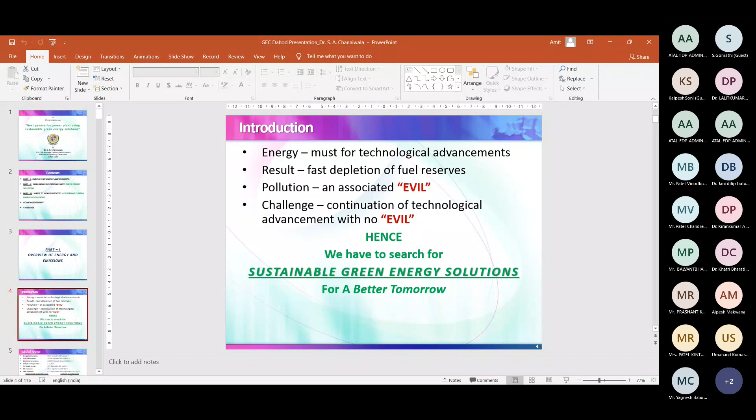I have divided my presentation into 3 parts. First part, overview of energy and emissions. Second part, coal-based technologies with green energy solutions. And part 3 is specifically added for you: Waste to Wealth projects, a sustainable green energy solution. And finally, I will give you a message.

Part 1 is the overview of energy and emissions, so let us talk about that. Energy is absolutely necessary for technological advancement, no element of doubt, right? What is the result? Fast depletion of fuel resources, and second is pollution, which is an associated evil. So what is the challenge before us? Continuation of technological advancement with no evil. Hence, we have to search for sustainable green energy solutions for a better tomorrow.

Now I take you to some data.

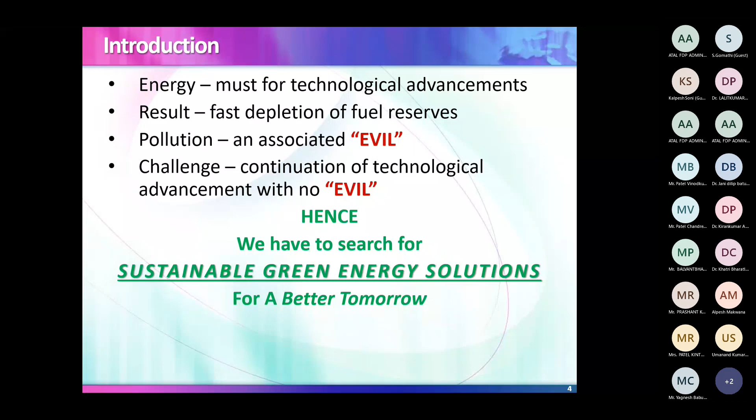If you take a global scene, your energy consumption is 584 exajoules. Coal consumption is 158 exajoules. Electricity is 27,000 terawatt hours. Our luxury ratio, which I call the vehicle to people ratio, is 1:6.75. Per capita is 75.7 gigajoules. CO2 emissions are 34.17 gigatons, and GHG, that is your greenhouse gases, is 47.5 gigatons of CO2 equivalent.

Now coming to the Indian scene, our consumption is 34.06 exajoules. Coal is 18.62 exajoules. Electricity we are producing is about 1600 terawatt hours. We are good enough - vehicle to people ratio is 1:5.63. Per capita is 24.9 gigajoules. And GHG is 3.24 gigatons of CO2 equivalent.

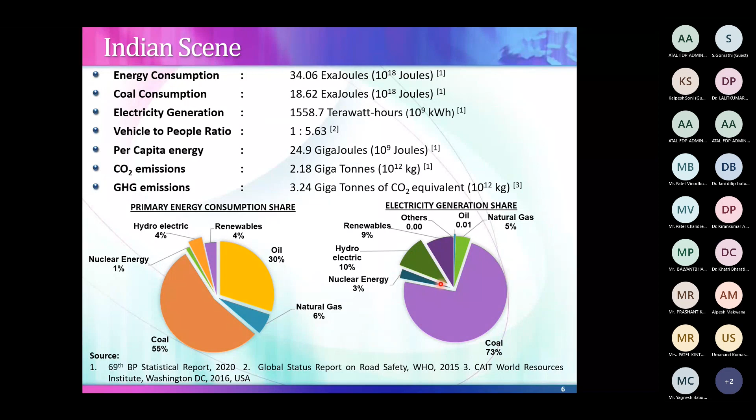So what is the consequence of high rate of energy consumption? First is the energy crisis. The world petroleum resource may be depleted by the end of this century. The world coal resource may be depleted in the next 2 centuries. This is data from BP Statistical Review at the end of 2019 - we will have 49.9 years only for oil, 49.8 years left for natural gas, and for coal it is 132 years. These are statistical data which is left with us. By exploration of new resources this data will change, but as of now this is the data available with us.

Second is, what is the consequence of pollution? First is global warming. In underdeveloped countries, the rise in temperature is 0.02 degrees centigrade per annum, and in developed countries it is 0.05 degrees centigrade per annum. A report from New York University said that New York will be flooded by the sea in 30 to 60 years, Mumbai in 200 to 250 years, and Surat will see sea water flooding in 250 to 300 years. That is the detrimental result of global warming.

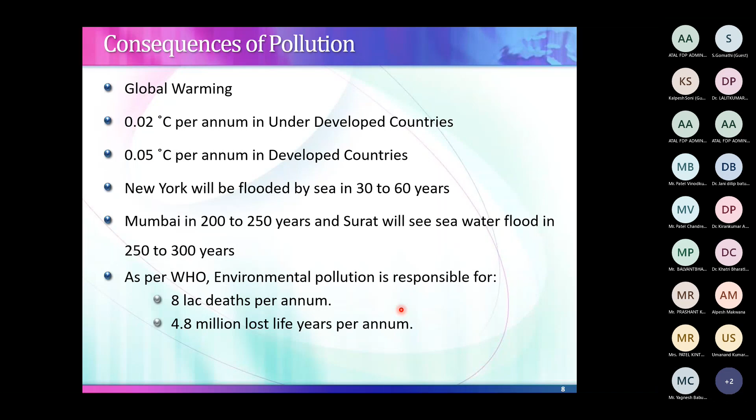Second part - as per WHO, environmental pollution is responsible for 8 lakh deaths per annum and 4.8 million lost life years per annum. So this is the alarming situation.

What this means is that we must search for feasible technological pathways towards sustainable green energy solutions. This solution must be adaptable to existing technologies and not imaginary - we should not talk in vague terms. Whatever solution we suggest, it must be adaptable with existing technologies. Then only we can search for sustainable green energy solutions. This is a fundamental requirement.

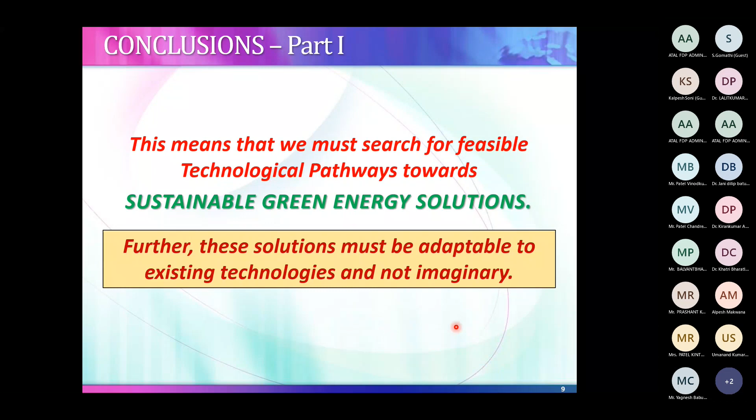Now, what we have seen is that the majority of power plants across the world and across India use coal. So we talk about coal-based technologies with green energy solutions - how we can make it more green? That is the part which is of concern today for every scientist.

So now look at it - we use coal and then we prepare coal, and this prepared coal is in the form of pulverized fuel. It is fired into a boiler, which is a pulverized fuel fired boiler, and we produce steam. The moment we fire this pulverized fuel

in the boiler, what problems do we face? Efficiency issues, higher stack loss, fly ash handling, higher CO2 emissions, higher particulate emissions, higher tube temperatures, higher erosion rate because of the particles - it will erode and reduce boiler availability and life due to erosion. These are the problems which we face at almost all power plants. Now we'll try to attack these problems first, and then we'll talk about something else.

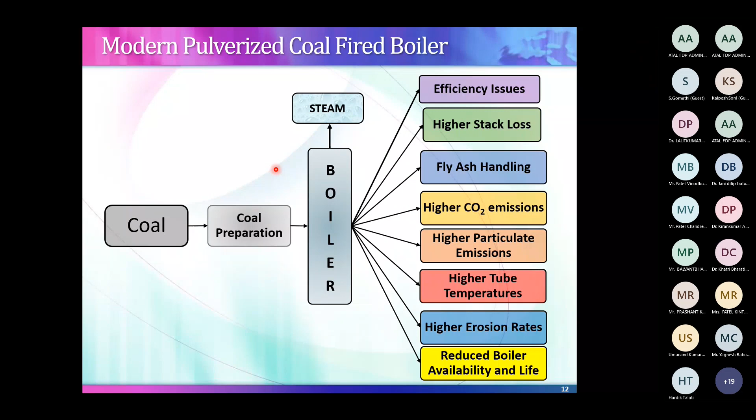Eta B is output by input. Output is the energy content of the steam. Input is the fuel energy, m dot f into GCV at P equal to constant. I write this specifically because all power boilers operate at constant pressure combustion. It is a fundamental requirement.

Now if I want to improve this simple equation, examine efficiency eta B. Eta B plus delta eta is my increment. What I have to do is increase m dot s. With this part we can improve efficiency.

Second part, this HFG, whatever is required in HS, HFW - decrease HFG, that is go for supercritical, so that will decrease my m dot f. Moment we enter supercritical, water directly converts to steam, so no latent heat component comes into the picture. Third aspect, simultaneously increase m dot s and decrease m dot f. So we can achieve much higher efficiency improvement.

These are mathematics. Now in practical, how can we do it? I look at the boiler efficiency from another angle. There is combustion taking place, so there is an efficiency of combustion involved.

Once heat is generated, it is transferred to the water to convert it into steam. When this is transferred, I use the word eta HT, that is heat transfer efficiency. So eta B is eta combustion into eta HT.

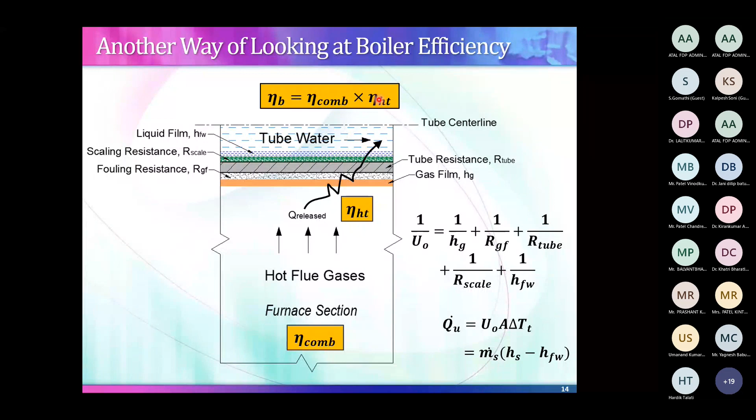Now let's go one step ahead. To achieve this, use advanced fuel additives. Advanced fuel additives have catalytic effect, so combustion efficiency improves and m dot f goes down. Similarly, these fuel additives have anti-fouling agents, so surfaces become cleaner, heat transfer improves, and m dot s is improved.

Apart from this, one beautiful aspect with this additive is it decreases emission, so global warming will reduce. Similarly, it reduces clinkering, so boiler maintenance decreases and boiler availability increases.

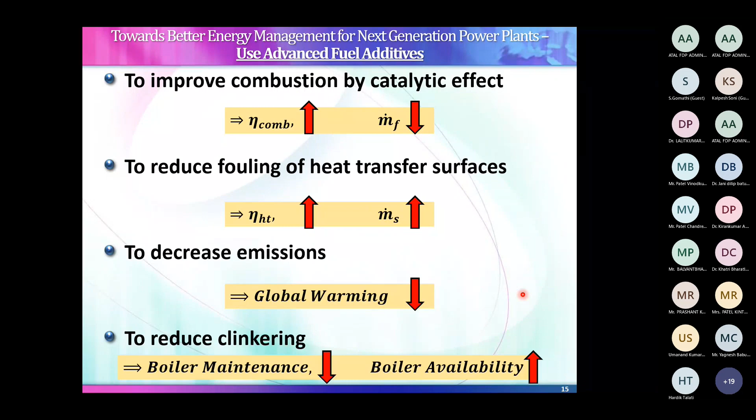In order to prove this in reality, we designed one fuel additive in 1995 and took a trial on Ukai thermal power station, 210 megawatt units. These are the data which we collected from the power plant, as per BS 2885 boiler efficiency test.

This is the layout of a boiler at GEB Ukai - all radiant superheaters, pendant superheaters, convective superheaters, and all economizer banks.

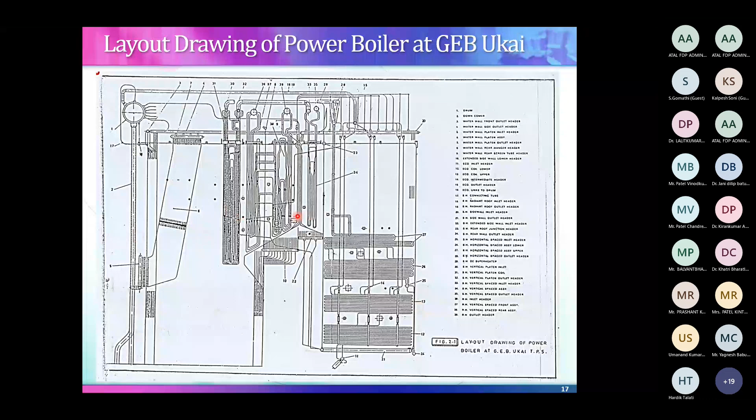And this is the effect we got. Auxiliary power consumption without use of the additive was 111.56 MWH per shift; with it, it has reduced by this amount, meaning fouling has definitely reduced. Boiler efficiency has increased from 80-83 to 85.64.

Generation efficiency has improved from 39-40 to about 40.661%. Overall plant efficiency improved from 36.59 to 37.56%. This means at this plant load factor, considering only 65%, there is a fuel saving of 19,621.1 tons per year, and economic saving is 2.8 crore rupees.

What is the dosage? Only 20 ppm of this particular additive, 95 SC. This additive was devised by me, and the technology was transferred to Altreat Chemicals.

Then on plant emissions - without the additive, NOx, CO, and SO2 had these values. With the additive, particulate reduced by 5.41%, SO2 by 58.24%, and NOx by 18.33%. This means the additive works for improving efficiency as well as reducing emissions.

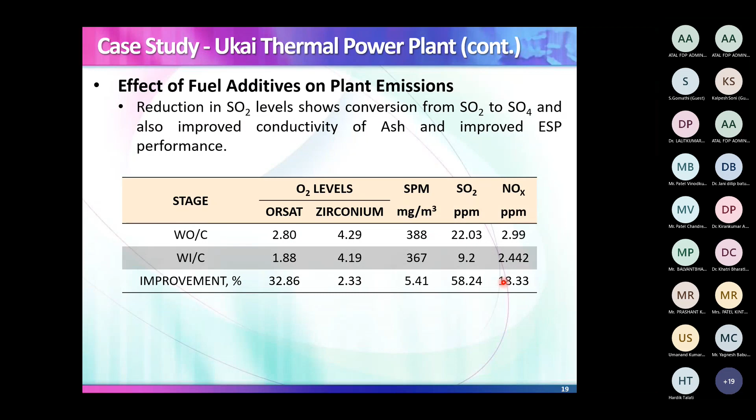The second case was a Panandhro thermal power plant which uses lignite as fuel. Lignite is the most detrimental and typical fuel to handle. The chief engineer of Panandhro called me saying they were facing a severe clinkering problem, with large swellings formed, and the boiler was under shutdown for 6 months to crack those swellings. He requested me to help.

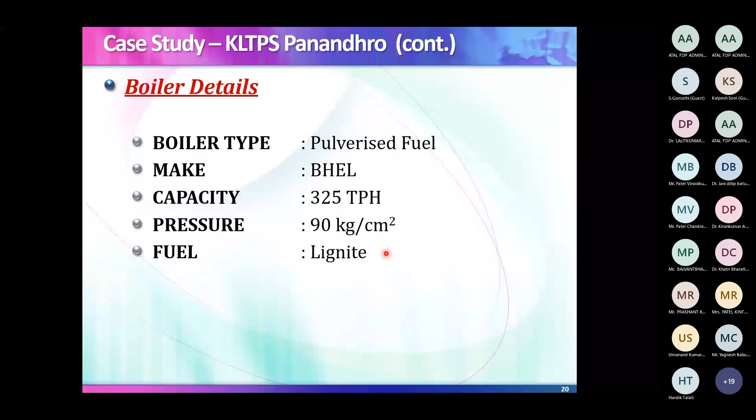So what I suggested was we developed another additive, 95 SCA. My name appears here indirectly, and the dosage was 40 ppm, that means 40 grams per ton.

Then there is a reduction in spray water. That means the heat transfer area of the tube has become much cleaner, and the steam generation is also improved. The spray water normally used to control the temperature of superheated steam reduced in use, showing some catalytic and anti-fouling effect. Without chemical it was about 27 tons per hour, and with it, reduced to about 18 tons per hour. This is also a sizable benefit.

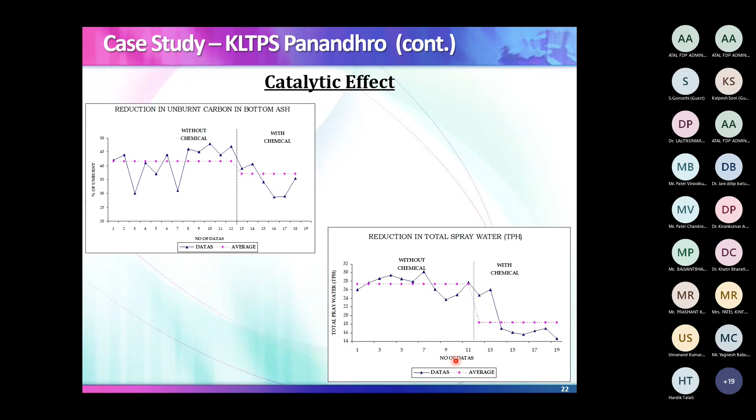Anti-emission, a sizable effect. Without chemical it was above 900 ppm, and with it has come down to 490 ppm. So this is the effect on anti-emission. That is the effect of that 95 SCA.

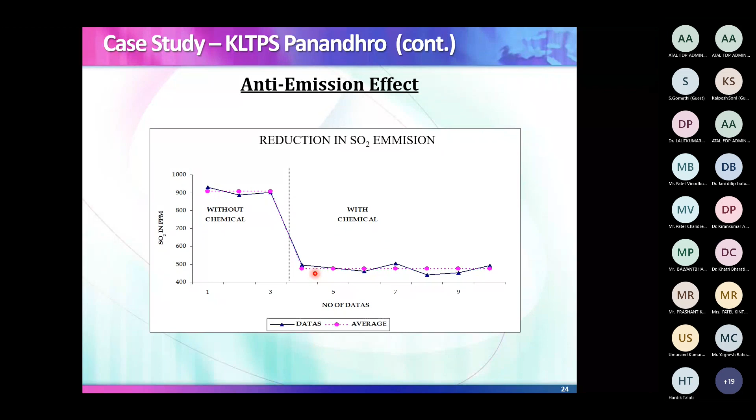To summarize: auxiliary consumption reduced by 3.21%, boiler efficiency improved by 2.74%, generation efficiency improved by 2.51%. At Ukai the efficiency was 34, but here it is 24 because lignite has low calorific value and is very typical high moisture, so that stack loss is much higher and efficiency is less. SO2 reduced by 23.78% and SPM by 30.92%.

So what is the fuel saving? 13,788.5 tons per year is the saving of fuel.

What observations did we see later on? This has been continuously working since May 97, 98 till now, and they are still using this additive. The benefits observed are longer boiler availability, reduction in downtime, and reduction in oil consumption, because once the boiler is down you have to fire oil, so that has come down as downtime reduced. There's reduced boiler outage due to reduction in clinker formation, and more MWH generation due to reduction in fouling and cleaning time. This is the beauty of this particular additive.

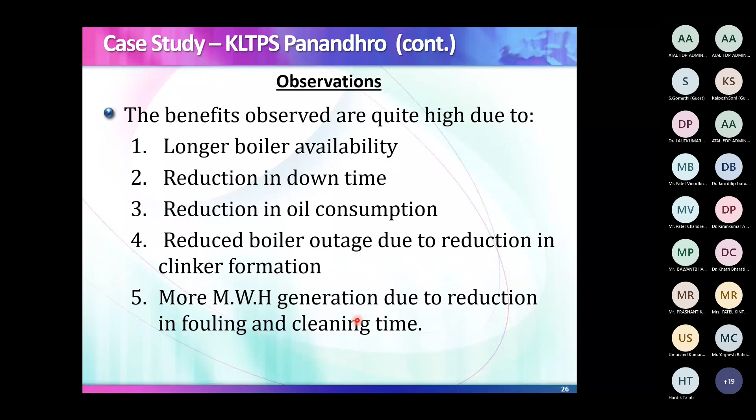These are the advantages we have been getting for more than 20 years. Now, the next step: fuel additives can improve efficiency by 2 to 5%, beyond that there is a limitation. So what is next?

The moment you go to supercritical, the critical point is 22.1 megapascal pressure at 374.1 degrees centigrade. Once we enter the supercritical region, pressure is 27 megapascal, temperature 593, and efficiency is 38.5%. If we enter ultra supercritical, pressure is 31.72 megapascal, temperature 604 degrees centigrade, and efficiency is 43.3%. So from 34% we can raise efficiency by 10% by going to ultra supercritical.

This is a benchmark. What is our current research goal? 36.5 megapascals and 704 degrees centigrade — this is the current goal.

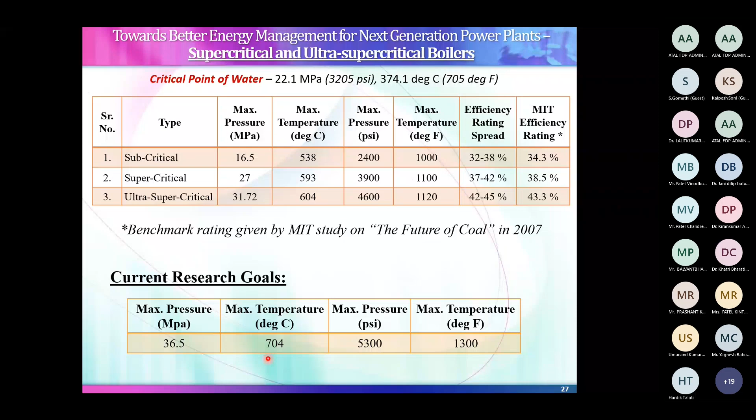If we increase the source temperature, then as per Carnot, W by Q1 equals Q1 minus Q2 by Q1, so 1 minus T2 by T1. T2 you cannot change because it is the atmosphere, so it is a sink. But T1 is under your control. The moment you increase T1, we are getting more and more efficiency.

So this is my subcritical line, 16.5, and we are getting 34.3%. Then this is my supercritical, 27 megapascal, 593, 38.5%. And then this is my ultra-supercritical, 31.72, 604, and 43.3%. And this is the latest, 36.5, 704 degrees centigrade, so greater than 50%.

That means now we have to switch from subcritical to supercritical or ultracritical or super ultracritical to achieve higher efficiency from the boiler.

Now, boilers even still use coal as fuel. Coal has the same problems when you pulverize it. So how to manage emissions? Now our target is towards combined management of energy and emissions.

What I do is incorporate a coal gasifier. What will the coal gasifier do? It will gasify the coal. All ash and clinkers will come out here and pure gas will be fired into the boiler. The moment we fire pure gas, the boiler efficiency will definitely improve and associated problems will be minimized.

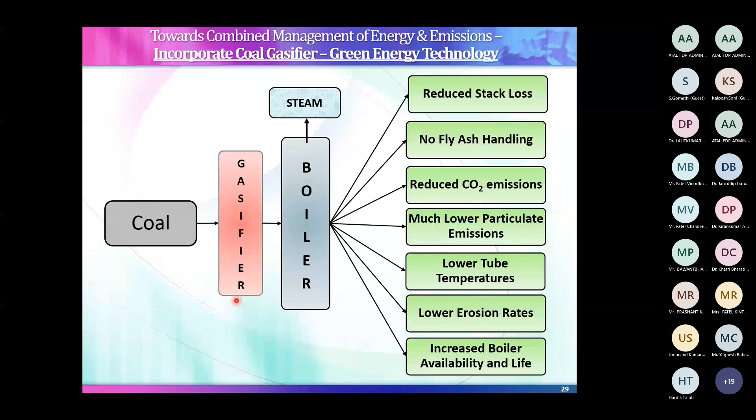What is gasification? It is a thermochemical conversion of carbonaceous feedstock into gaseous fuel. Gasification is classified as a clean energy technology. It improves overall conversion efficiency by 1 to 3%. It reduces particulate emissions by 50 to 80%. It reduces CO2 emissions by 10 to 30%. It enables gaining carbon credit for a country like India.

My preliminary calculation shows that through the use of gasification, CO2 emission is reduced by 28.24%. This means that if I use 1 million tons of coal gasified, this will reduce 2.1824 million tons of CO2 emissions, and we will earn 2.1824 million carbon credits. That's the beauty of gasification.

Now, what is the application? It has a very wide application. You can use a gasifier for process heat requirements. All ceramic industries in Morbi use gasifiers. You can use it in steel industries and glass furnaces. You can produce steam - all process steam requirements of wet process units, like textile, can be met through the use of gasification. And you can produce power, either small scale, medium, or large power plants, for improved efficiency with minimum emissions.

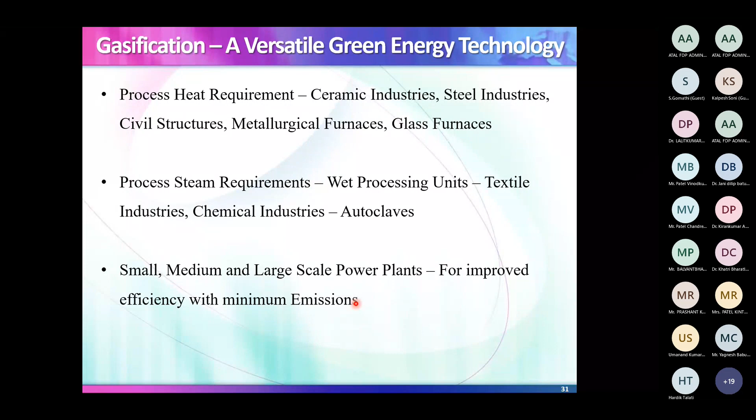Now, what is gasification? The term gasification covers the conversion of any carbonaceous fuel to a gaseous product with a usable heating value. It converts the entire non-ash fraction of the feed to gas. So this is my feed - there is a gasifier, I supply partial air. You will produce the producer gas here with this composition, and some char and ash will come out. That means this won't go to the boiler, so no erosion, nothing. And this gas you can use for power generation.

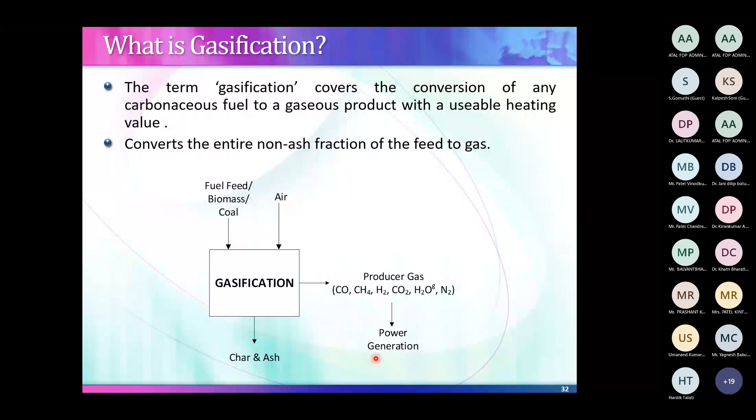This is the outcome. How many types are there? First type I call a downdraft. That means your feed is fed from the top, air is also given from here, it comes out and gas is taken out. That means flow is downward, so it is a downdraft.

Second one is updraft. Air is fed upstream, fuel is coming downstream, and the gas is taken out from here. So there is upflow of gas, hence it is updraft. And these are the zones which appear in the gasifier.

Cross draft is where I supply air from here and take out gas from the opposite side. So it is a cross draft. These are all known as fixed bed gasifiers.

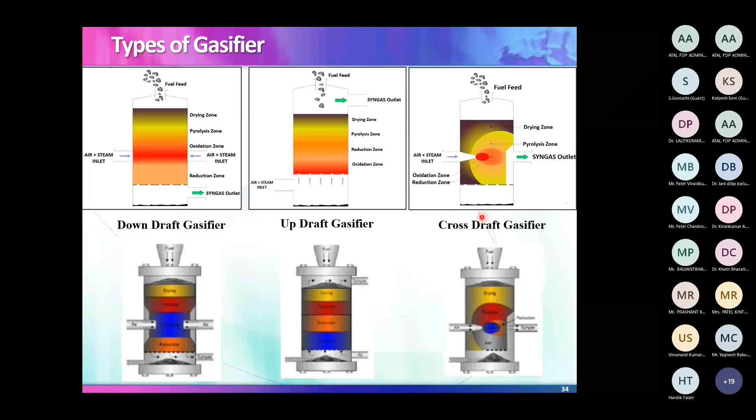Still more advanced is the circulating fluidized bed gasifier. Here you can see a complete circulation takes place. This high pressure circulation takes place and your gas is taken out from the top, and this is the ash which is taken out.

So this is circulating, and the most advanced is plasma. The moment you deal with high ash content coal or any waste or industrial hazardous waste, you have to go for a plasma gasifier - there is no other option with you. So this is the most advanced technology, and this also I will share with you at a later stage.

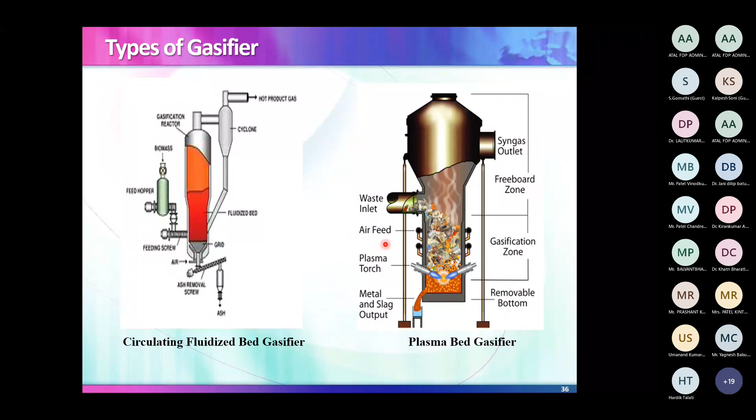Now, it's often said that gasifier is a green technology, but when I was working at IIT Bombay on my gasification project, I encountered this problem: particulate emissions, liquid tar. It was eroding all my valves, so the engine used to be taken for shutdown very frequently. Then contaminated effluent, because we need to cool the gas by spraying water, which produces effluent. Then there is gas leakage, and overall efficiency is quite poor.

How to tackle this problem? This was my area of research from 1992 onward, after completing my PhD. My continuous thought process led me to conceptualize a zero discharge gasification system. TAR - how to minimize TAR?

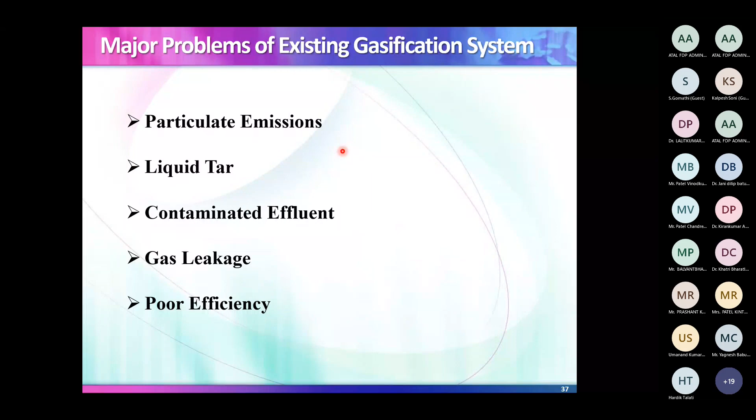Capture it in a wet ESP, then vaporize or crack it in a kiln, and then refire this in the oxidation zone of the gasifier. So your TAR will minimize.

Contaminated effluent: go for an indirect cooling system, so your direct water spray reduces to about 5 to 10% only, no direct spray. This is through a series of coolers and condensers. Then that little effluent, you can condense this particular effluent and refire it back into the oxidation and reduction zone. For gas leakage, incorporate a water seal at the appropriate place so there is no gas leakage.

Incorporate SCADA. This is a system which will monitor the performance of the gasifier, and if there is any deviation in the operating parameters, it will try to correct it. So it is an auto control system.

I did not stop here. We modeled it - can we do this, because if you refire the effluent, probably your temperature levels will go down since it's water. If you refire the tar, probably it will reduce the temperature level. So first, believe me, anything you do, please do it scientifically - that means first make a model.

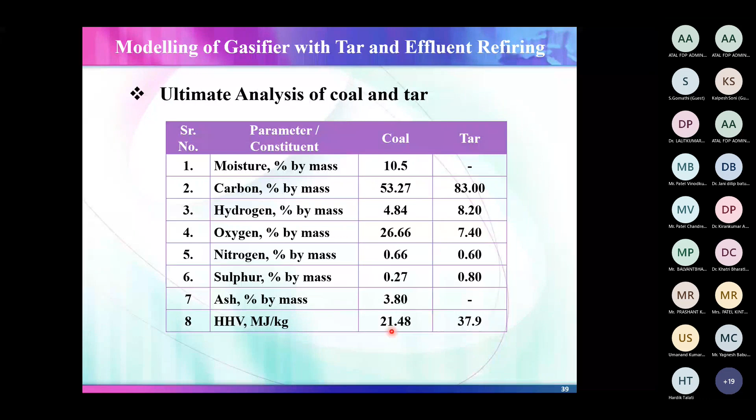Then thermodynamic modeling demands that you should go for constituent balance. So this is a total constituent balance, 5 equations, and then energy balance. Total energy in must be equal to total energy out. So that is it, and based on this you will formulate your model and see what gas quality you get.

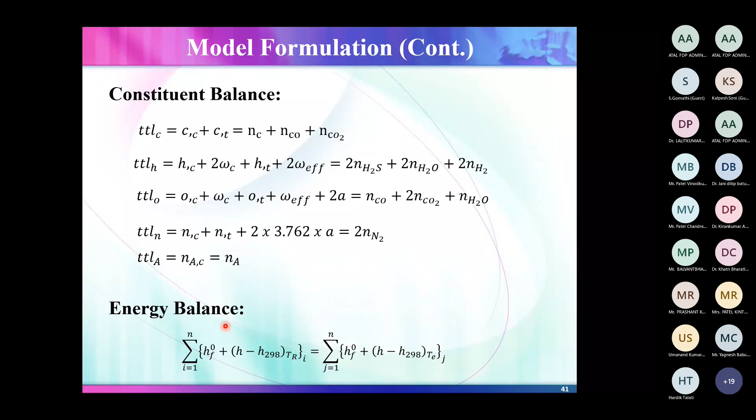All this model told me that your LHV is reasonably good, your efficiency is improved to 80%. Now this gives me confidence that if I refire my tar, if I refire my effluent, I am not going to get any detrimental effect, but we will improve the efficiency.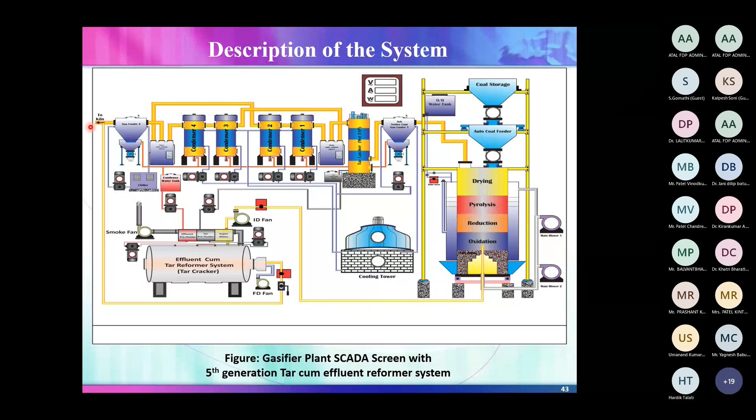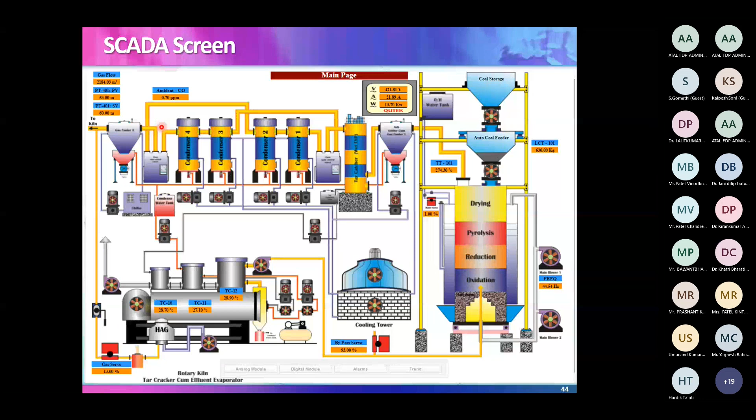Say the owner, these are Effil Ceramics, they produce vitrified tiles. Now these vitrified tiles demand about 1250 degrees centigrade temperature, and a normal gasifier cannot give that temperature. So he challenged me that Chanila Sahab, can you do it? I will take a risk to install your gasifier in my premises. I said we will do it.

Then there is a tar catcher, these are series of condensers, and there is a final settling chamber, and there is a chilling plant and cooling tower.

Another view, there is a chilling plant to cool the gas so that any moisture left out gets condensed, and a pure dry gas goes to the kiln.

Earlier, whenever the gas goes to the kiln, it has moisture, it has tar, so it will create black and white spots on the tiles. So the net export quality of tile which they used to get was less than 15%. With this technology, Arvind Bhai confessed that sir, we are now getting more than 60% of our tiles of export quality. So their production improved, their quality of production improved with this category of gasifier.

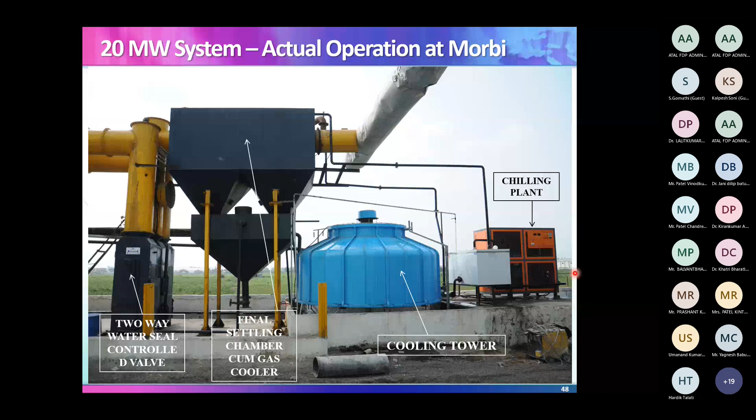Then I wanted to get satisfied by myself. What is the performance? This is the actual gasifier installed. After that we wanted to establish the performance, so we selected one small system, that is a 6 megawatt, and we carried out the performance and emission trials.

This is the gas quality which we got. You see what is the efficiency? 75.745%. What theoretical was 80%, we could get 75.745% in reality.

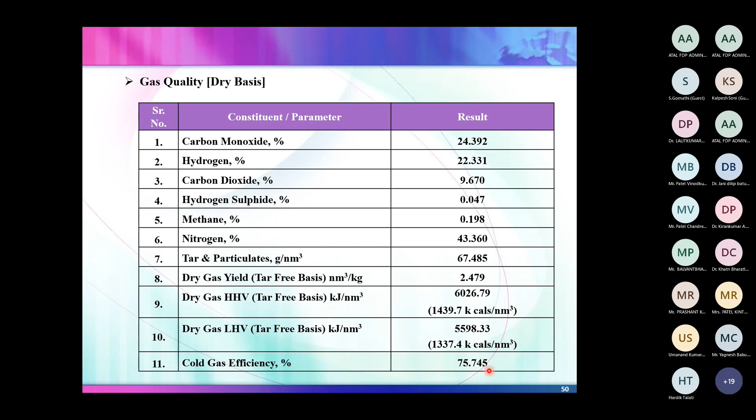And this is a complete mass balance. What is the mass input? Inherent moisture, biomass, steam, water, air - this is the 100%, about 1772.618 kg per hour is my input. What is the output? There is water vapor, CO, CO2, H2, H2S, all - and this is the output. So this is a mass balance.

This is absolutely necessary when you want to conduct a systematic trial. You must carry out mass balance and energy balance studies. There may be 2 to 5% deviation, accept it.

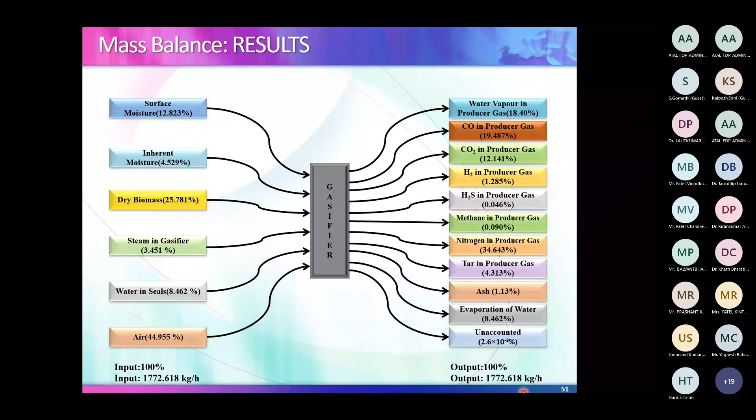And another important one, ambient air quality - because we are not emitting any particulates. Our emissions on the particulate side will come slightly later, I will show you the quality. These are the results - they are much less than the national air quality standard limits, so we are happy with these results.

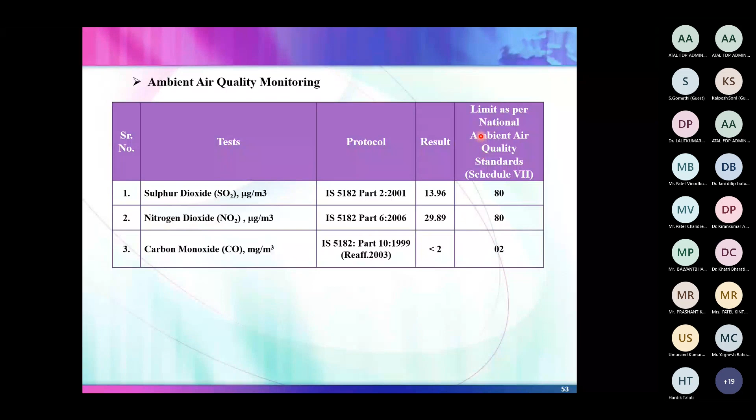And discharge - no tar, no effluent, no gas leakage. And the other part - 1 million tons of coal gasified could reduce 2.1824 million tons of CO2 emissions, and 2.1824 million carbon credits we can earn. So these are the results of my zero tar and effluent discharge technology.

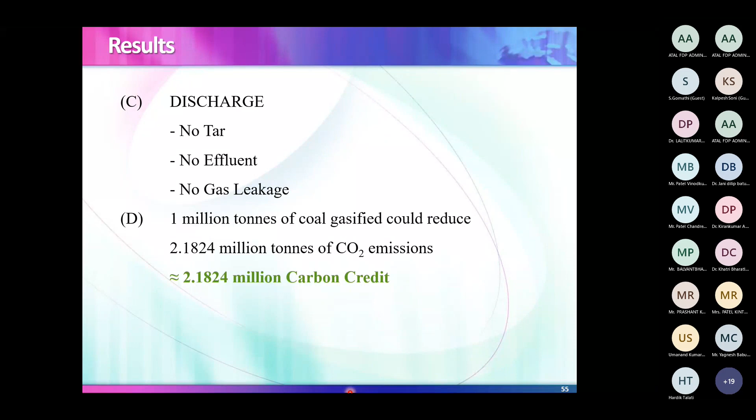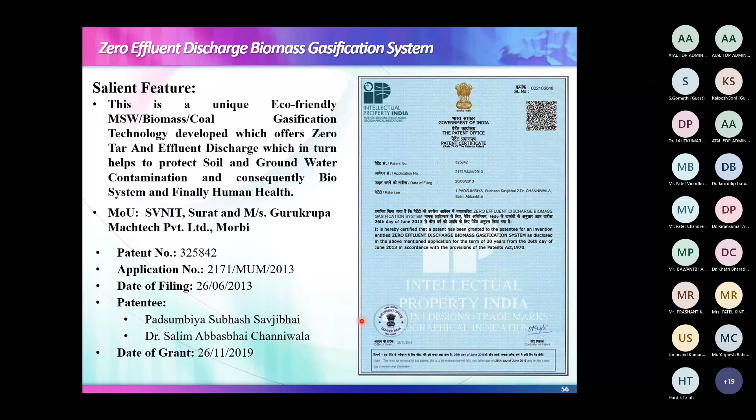They visited to actually assess is it really a zero discharge gasification technology, and they could certify that yes, it is 100% zero discharge technology. They visited Airfield Ceramic also and they were satisfied. And about that now, this personality is Dr. V.K. Saraswat - he is a principal scientific advisor to the Government of India, was a DRDO chief, and presently a member in NITI Aayog. He was also so impressed, he said I would like to visit your plant because it is the first across the country, and probably across the globe, which offers zero tar and effluent discharge.

So Dr. Saraswat visited Morbi and I was explaining him this research facility. He also visited Airfield and one more industry where this system is installed. Again, the same view - and this is from the National Air Pollution Control Authority, so they also visited this particular system.

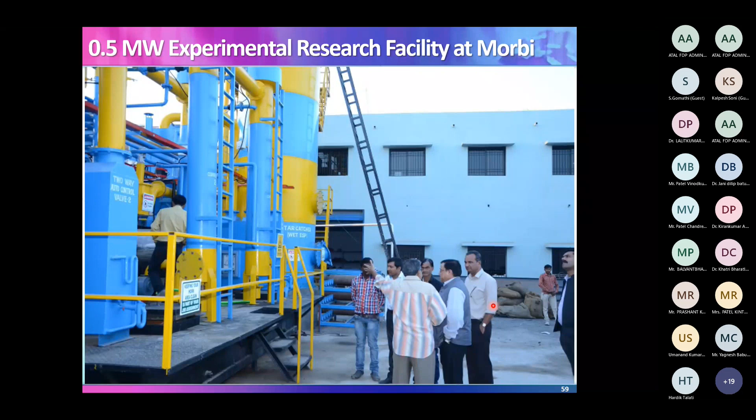Then the challenge comes now. Dr. Saraswat asked me, Channiwala, we have F-grade coal across the country which is about 45 to 50% ash. Can we gasify it? Can you develop a gasifier which can gasify such high ash content coal? Then this challenge was taken up.

Coal consumption, because of our increasing power demand, has grown by 5.7%. 56% of primary energy comes from coal, and India is rich in coal resource. That's the fortunate part. F-grade coal, the lowest grade coal, dominates major power generation, which is responsible for high particulate emissions and greenhouse effect.

So what is the solution? The solution lies in adoption of clean coal technology, CCTs as we call it. Gasification is one of the CCTs which reduces both particulate emissions and greenhouse effect. Hence one can focus on gasification of low rank, high ash content coal.

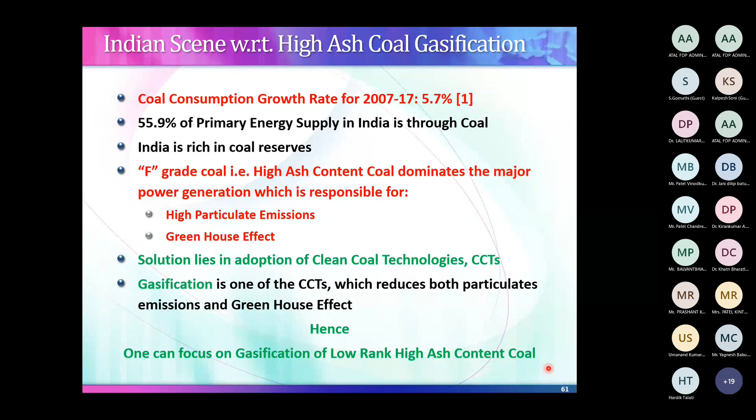Now this is a challenge. So this challenge was accepted, and what we did first, as I always advise all my students, is to theoretically establish yourself first. Do not neglect the theories which you have learned. They form the foundation or basis for any experimental work.

Once I was satisfied with this modeling result, then we conceptualized. What concept did we get? We developed a hybrid gasifier, that means partially fluidized bed cum updraft type. Why partially fluidized? Because this coal has high ash, so it needs to be surrounded by air, meaning we have to partially lift it. So partially lifting it means it is a partially fluidized bed cum updraft gasifier.

And these are the dimensions, and this is the 3D view of the entire gasifier. You can see the difference here: it is a feeding hopper. The difference lies here, in the high ash gasifier cell, and this is the ash zone. Then we fired that particular unit.

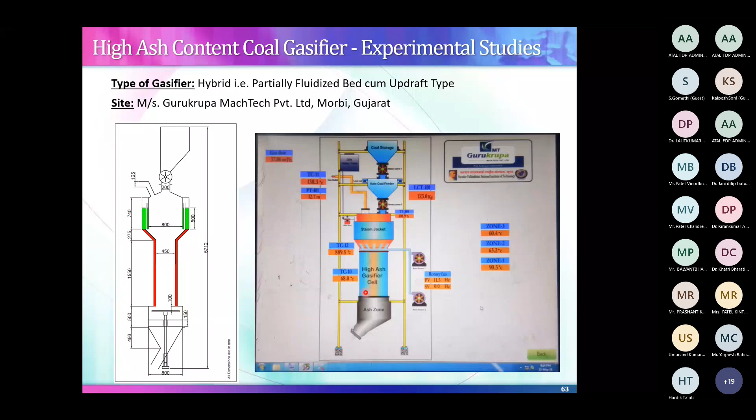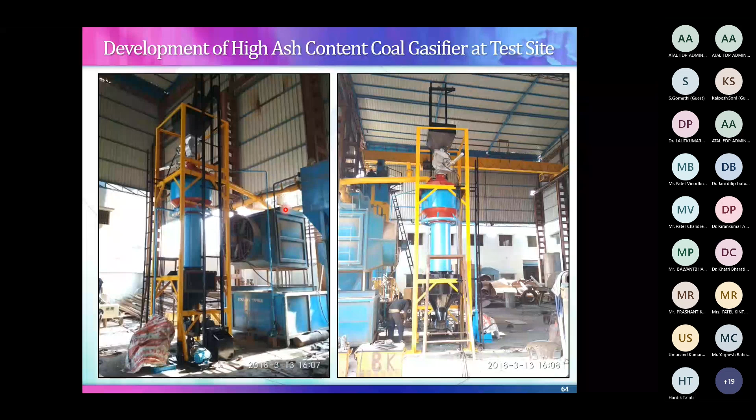Again, next step: first was modeling, second was development, third was now performance trials. So we took a performance trial on this gasifier, and these are the results. The average calorific value we could obtain is 4,500 kilojoules per meter cube, and these are the trial dates, May 18.

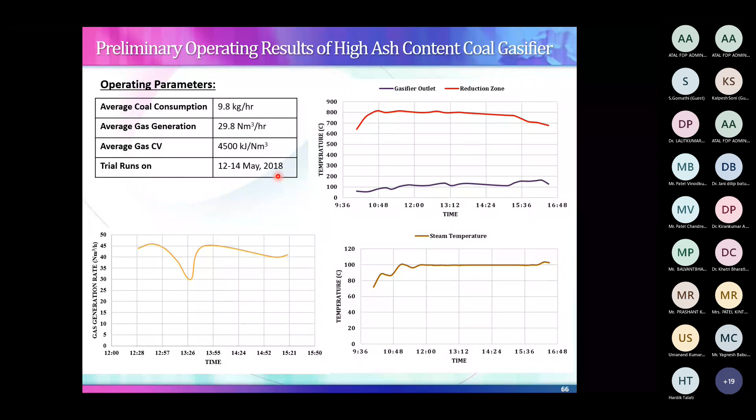Then we have enormous waste. Either you take hospital waste, or industrial waste, or municipal solid waste. Can we harness this energy to produce power? The answer is yes. So the first part we targeted was hazardous waste and hospital waste, meaning the plasma gasifier.

So this is all hazardous waste. This is taken to a gasifier which I call plasma. Only plasma can solve this problem, because whatever inerts exist, this hazardous industrial waste will generate dioxins and furans. These dioxins and furans are cancerous. The moment they are emitted into the atmosphere, and if you inhale them, cancer is going to develop over a period of time.

So dioxins and furans need to be killed. How to kill them? The only solution is you have to develop a temperature of about 1250 degrees centigrade, giving a residence time of 2 seconds minimum—then only will this get destroyed. So plasma is the only technology which can do this, and it will destroy your dioxins and furans.

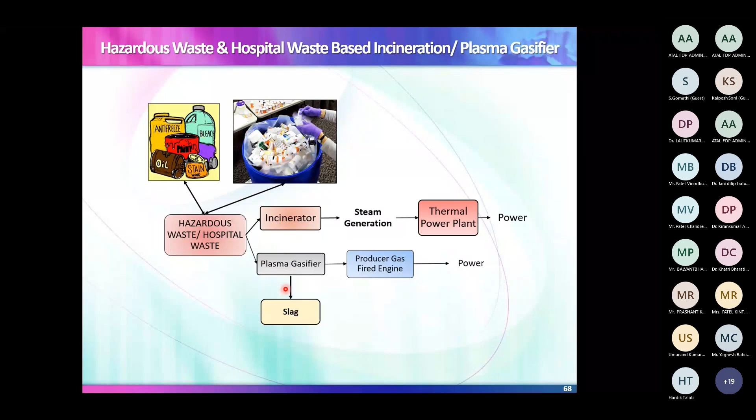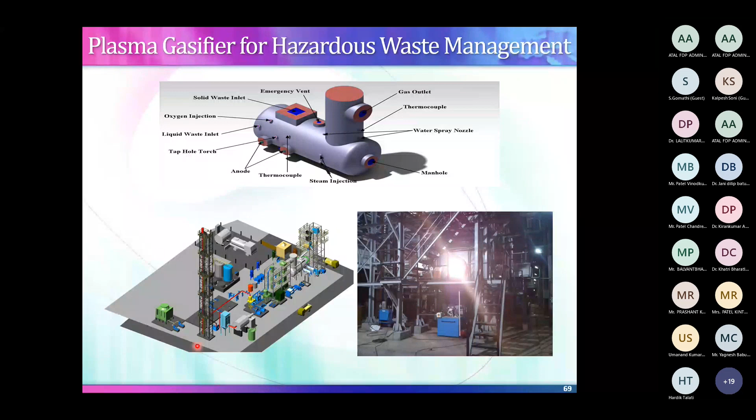What is the salient feature? This technology is devised to treat and convert hazardous industrial waste to wealth through gasification, and this was jointly developed by SVNIT and ANPRO Surat. And then came the next generation development: hybrid plasma gasification technology for MSW management, incorporating a patented zero tar and effluent discharge gasification technology.

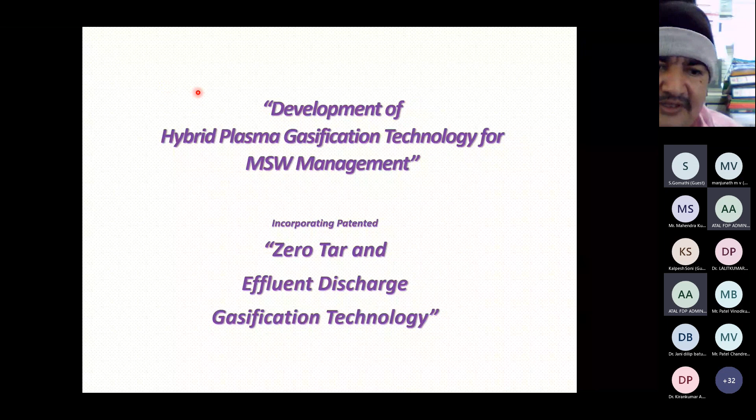Right, so now the next thing we thought about is that enormous waste is available in the country. If I give some statistical data, if we continue to produce our MSW at this rate, by 2030, one-third of the land of India will be covered by heaps of this MSW. That means we need to do something in this direction.

So taking this into account, we started development of this hybrid plasma gasification technology for MSW management. But this is not restricted only to MSW. When you go for plasma, you can use any waste, industrial waste, or even high ash content coal, anything you can use. And this we are incorporating with our zero tar and zero effluent discharge gasification technology.

So the first part, what is the objective? To model and design a small-scale hybrid plasma gasifier to manage 100 kg per hour MSW. This is the project of my Bhatnagar fellowship. They always say that your technology must be applicable to the society and beneficial to the society. So this was my first objective.

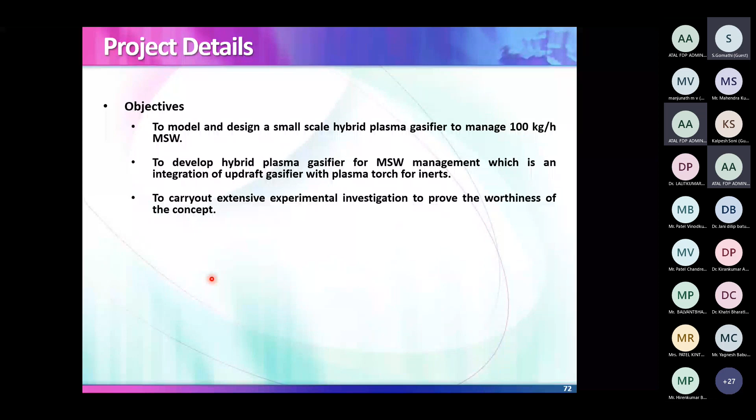So what we did, again same approach: first you go for theoretical studies and modeling, then the concept, then actual development, and then performance. So this is my input data: MSW 100 kg per hour. Organic in the MSW is all vegetable waste, house waste, food waste.

That is 50 kg per hour. Inorganic 50 kg per hour is present. This is the component which is our target, this is the composition: moisture, fixed carbon, volatile, ash and HHV, and this is my ultimate analysis. So with this data, we wanted to proceed.

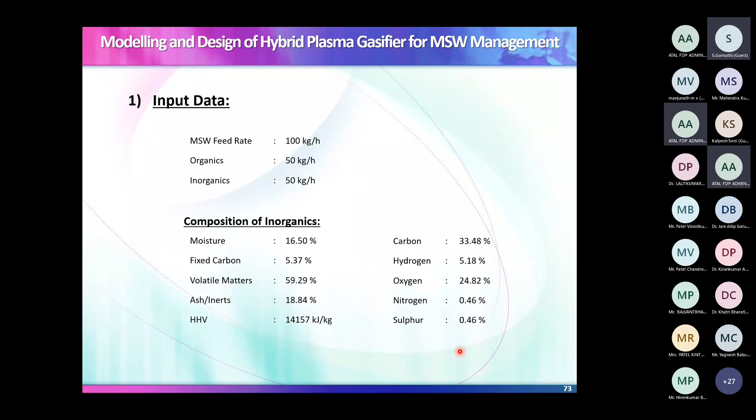We first went for energy balance because plasma technology is regarded as the most expensive technology, and normally it is an energy negative technology. That means whatever energy we give in is more than whatever energy output we get. So the first thing is we have to challenge this part. So I carried out the energy balance.

This is my input energy, 50 kg per hour. This is the calorific value divided by 3600. So this is my E dot in, 196.625 kilowatt. What is the output?

If I connect it in the gasifier, its efficiency is only 55%, I have taken, because a lot of inerts are there. And so output energy is this into this, that is 108.14 kilowatt is the output energy in the producer gas, which I get out of my plasma gasifier.

And what is the power produced? This gas will go to the genset, so eta genset will come into the picture. I have taken only 20% efficiency. So output is 21.628 kilowatt.

What is the plasma energy requirement? You have m dot S into Cp S into delta T. So sensible energy required to bring ash to its melting temperature, then ash into the latent heat, right? Plus, the moment it becomes liquid, you have to heat it to a desired temperature.

So here, m dot ash which we produce, because 18.84% is the ash in the material, 50 kg per hour is the feed rate, 0.84 Cp into delta T is 600 plus 500 into L is the latent heat, and this is the sensible heat for molten ash. So I need plasma energy of 4.59 kilowatt.

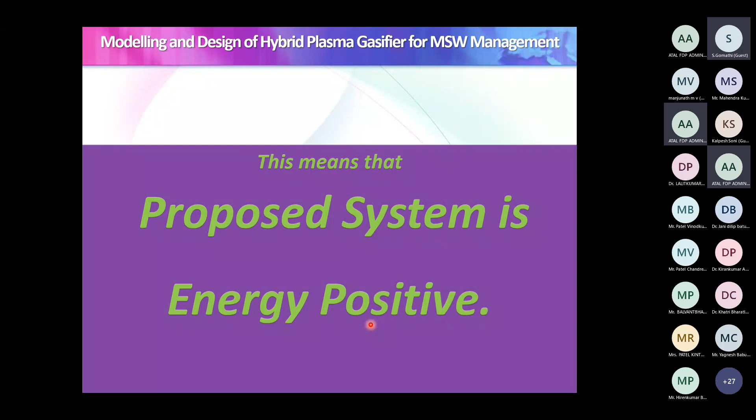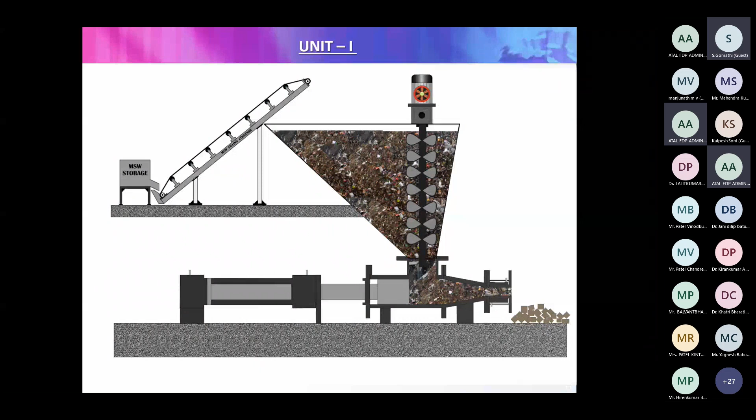What is unit 3? This ash is fed to the plasma gasifier. This will melt all this particular ash and you can have a liquid. This liquid can be molded to a desired shape. You can see, I have taken only paver blocks. And even whatever gas is produced here, this gas you can use for your power generation. What is the third unit?

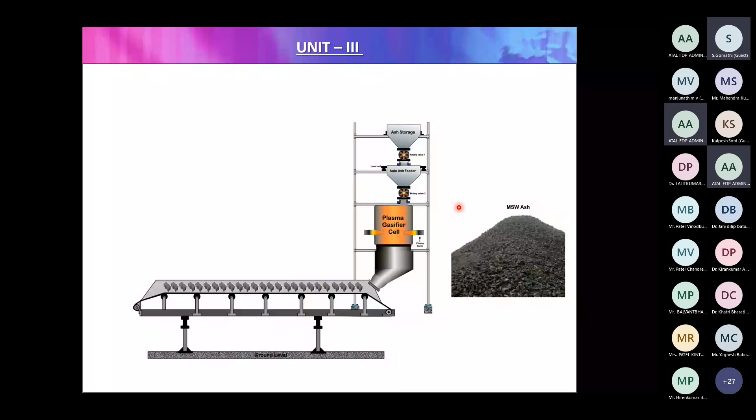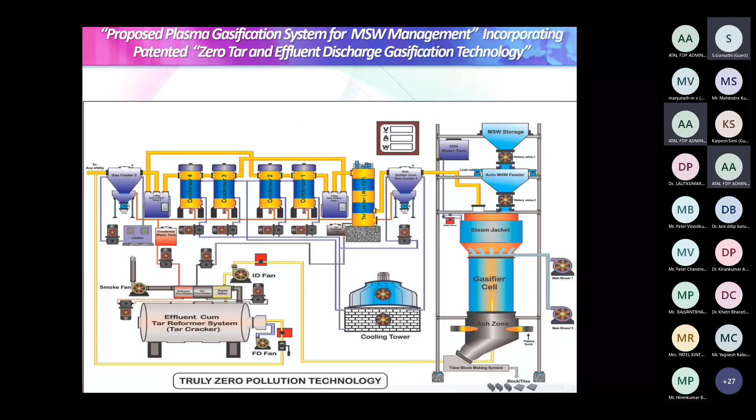And this is a complete schematic. The proposed plasma gasification system for MSW management, incorporating patented zero tar and effluent discharge gasification technology. So this is my gasifier. This is my plasma zone, and here is coming out your liquid. So it is a paver block.

And this gas from here is getting cleaned here, and finally clean gas goes to the utility. So this is the entire system, and I call it a truly zero pollution technology. Even no solid is being produced here, only useful solid is produced.

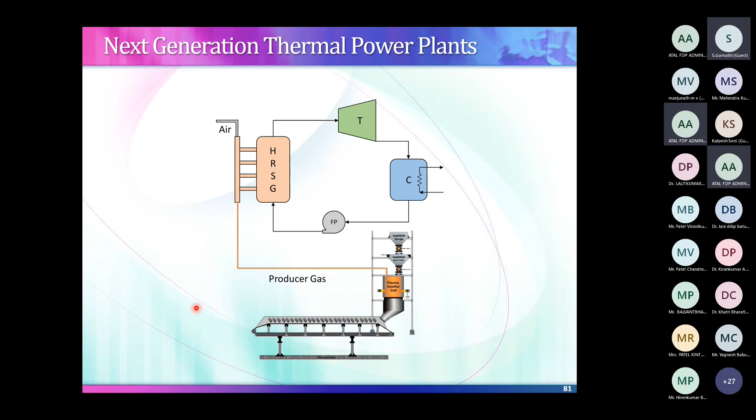So these are my conclusions of part 2. Part 3 is on the waste to energy project, which we'll see later on. First, conventional power: we have an established facility of more than 3 lakh, which is the power generation capacity of Indian power plants.

So first we have to tackle conventional thermal power plants. Go for regular energy audit. It will give the areas where you can improve the efficiency.

Adopt suitable water treatment so as to minimize water side scaling and resultant maintenance. This will improve your heat transfer efficiency. Keep heat transfer surfaces clean, optimize soot blower frequencies. This will improve your heat transfer efficiency again.

And this is very important: use correct mill settings so as to minimize losses in fly ash and bottom ash, and also the maintenance of the mills. Now this is a practical aspect. You have to go for mill setting. The distance between two bowls of the mill is very critically set so that you get a correct quality of pulverized coal, which will give you the minimum unburnt in bottom ash.

Then incorporate appropriate fuel additives. This will help in catalytic combustion, minimize fouling and clinkering, and reduce emissions, thus helping in energy and emission management, along with offering longer availability of the boiler. So this is what we can do with conventional power plants.

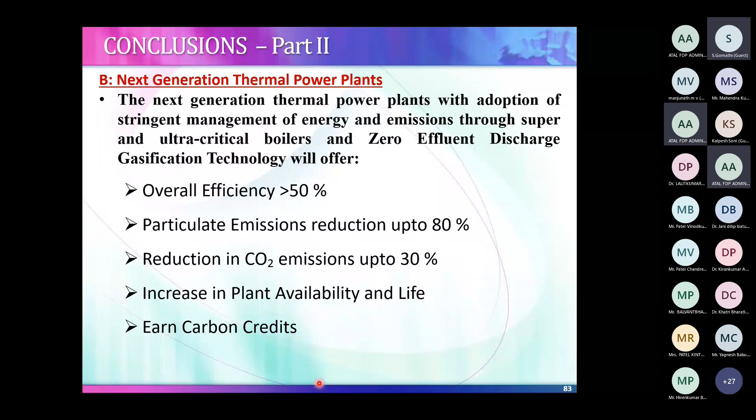The particulate emission can reduce by 80%. CO2 will reduce by 30%, meaning your global warming potential will decrease. It will increase plant availability and life, and earn carbon credits for a country like India. This is my part C.

Plasma gasification based power plants can generate power from any waste, or coal, along with producing useful products like blocks, tiles, etc., thus truly offering a 100% clean energy system. Our target in totality is to have a clean energy system. That alone can be a sustainable technology, or I call it a green energy solution.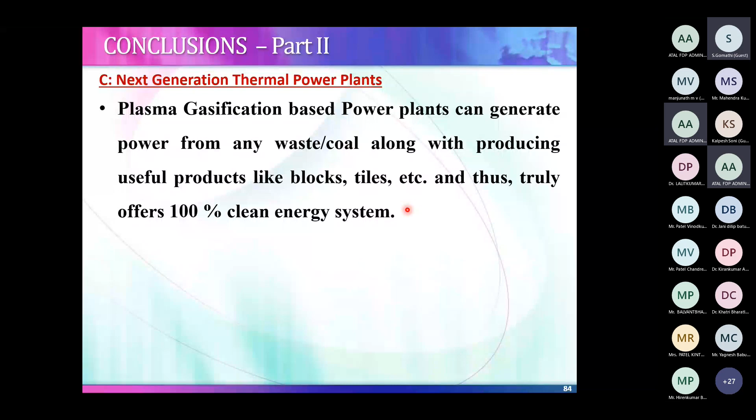So what we are focusing on is only a very small part: waste to energy. At present, we can focus on all of it, but I am limiting this particular presentation only to waste to energy, waste to wealth.

Now here is the motivation. If you take the livestock and poultry population in India, this is the distribution: poultry 729.21 million, cattle 190.9 million, buffalo 108.7 million. This is the population recorded in 2012. The latest data we could not find, but these are the 2012 figures.

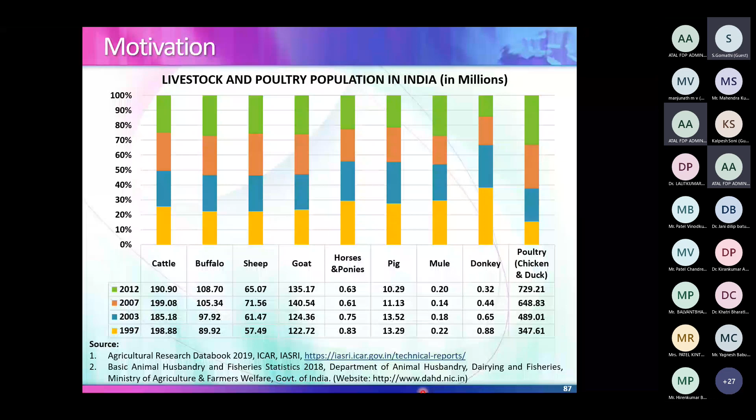If I summarize this, we have a total livestock of greater than 500 million and total poultry of greater than 700 million. Estimated manure generation is greater than 5,000 million kg per day, which can be converted to bioorganic fertilizer, which is a need of today, because chemical fertilizers and pesticides will create cancer.

The second phase of my life after retirement is dedicated to the welfare of human beings and society. So I have changed my direction towards development of bioorganic fertilizers and bio-CNG projects. Estimated biogas generation is greater than 150 million cubic meters per day, and estimated electricity generation is greater than 6 million kilowatts. This is the motivation.

So the first thing I did was in 2002 for Surat Municipal Corporation at Anjana sewage treatment plant. There is sewage coming in here. This sewage we have taken to the biogas plant. We modified the digester to produce gas from this low energy sewage.

Whatever biogas we produce, we first take into a genset to produce power. It can go through catalytic conversion to produce methanol, or you can bottle it to produce bio-CNG bottles. The slurry can be used as a fertilizer, or it can be used as an energy cake.

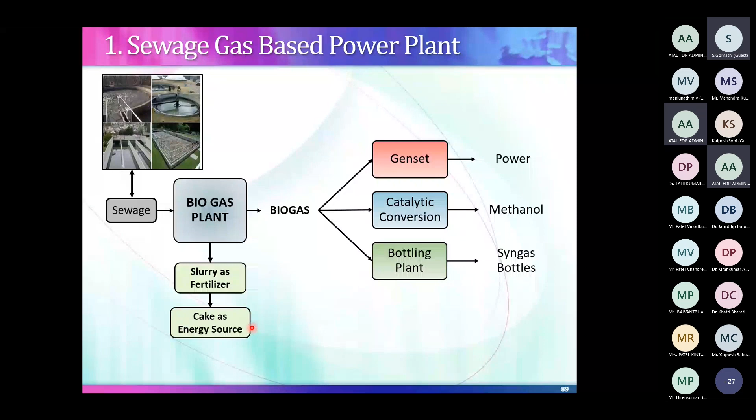This is the concept, then developed for Surat Municipal Corporation. It was first of its kind in India. This was at the Anjana sewage treatment plant of Surat Municipal Corporation.

Its capacity is 0.5 megawatt, and it generates power from sewage gas through anaerobic digestion. All these digesters were part of an effluent treatment plant, which I modified to produce good quality methane. This methane was cleaned and stored in a biogas holder, and from there taken to a 500 kilowatt Spain-made Guascor generator.

It was the first such generator coming to India, so we went to Spain to test it. Guascor has a very good test facility there and can simulate any gas composition. We supplied them our gas composition, they produced the simulated gas, ran the engine, and tested it for full capacity of 500 kilowatt. Only once this was tested did I permit them to export it to Surat.

The components are: suction blower, scrubbing system, holder, and this is my engine. There is also a flash pump. In case the engine is under maintenance, gas generation continues, so it needs to be flared. This is the flare stack.

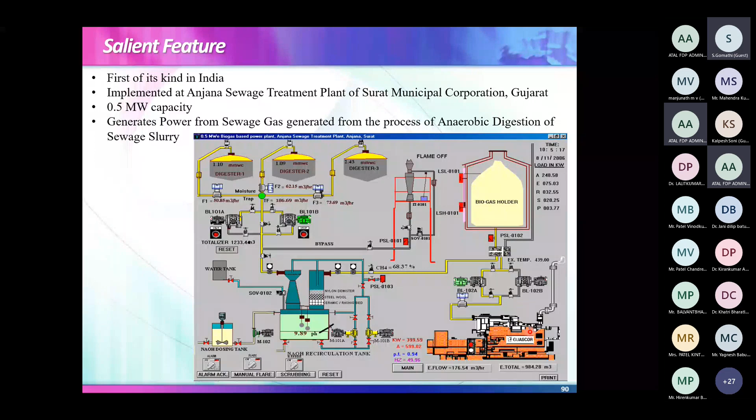This is interesting data. In 2002 we established Anjana, and it is working till today successfully. I use the word 'till' because for more than 20 years this plant has been working successfully, producing 19.46 lakh kWh per year of electricity.

Inspired by this success, today 8 such projects are available. These are data from 3 more: Karanj, Singanpore and Bhatar, showing the power generation from these projects. This is the wealth we have created from waste.

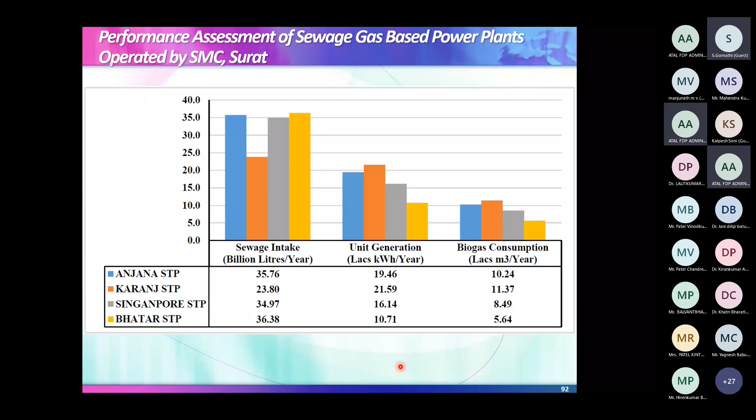A vegetable waste based biogas plant was taken up for our APMC market in Surat. This waste goes to the biogas plant where we produce biogas, which can generate power, produce methanol, or go for bio-CNG bottling. At this project, we are producing bio-CNG bottles as well as slurry as fertilizer.

Capacity is 35 tons per day of waste vegetable matter, and biogas generation is 5,000 meter cube per day. These are the 3 digesters, and here are some internal details of the digesters.

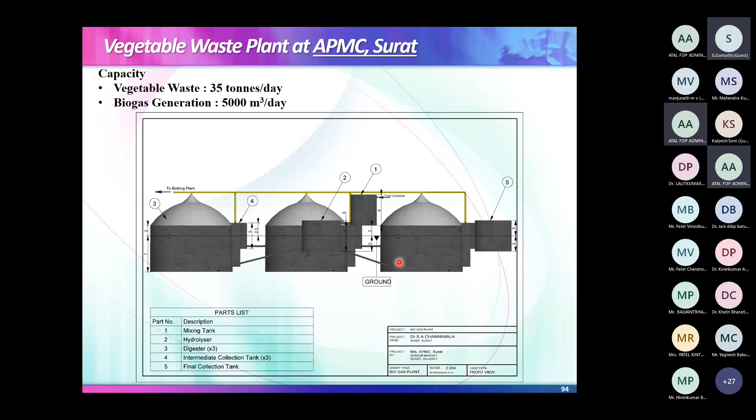This is the photographic view showing the 3 digesters and the feeding platform, along with the gas storage balloon. Swamiji from ISKCON had come to visit this plant; they also want to adopt such technology, so they visited us and are considering implementing it. This is my APMC based power plant.

Then we worked on a more advanced product: a 2,200 kg per day bio-CNG plant, called the compressed biogas plant at Dungra, Kamrej. The objective set was submitted to MNRE for grant to produce 5,000 meter cube per day raw biogas and 2,200 kg per day of bio-CNG. Before purification, biogas has methane, CO2 and H2S.

CO2 and H2S are removed, so we get net 2,200 kg of bio-CNG, plus 20 metric ton per day of solid organic fertilizer and 70,000 liters per day of liquid fertilizer. The feedstock targeted was gobar, chicken droppings, vegetable waste, and food waste in general. Specific data: 3,200 metric ton per year of food, vegetable and agro waste, while 13,200 metric ton per year of animal waste, that is cow dung and similar material.

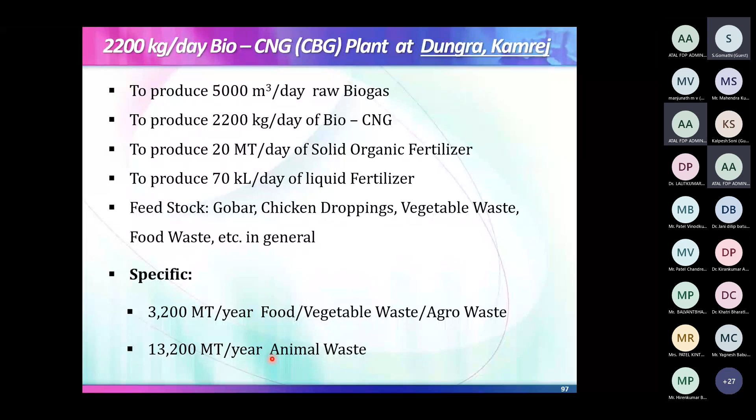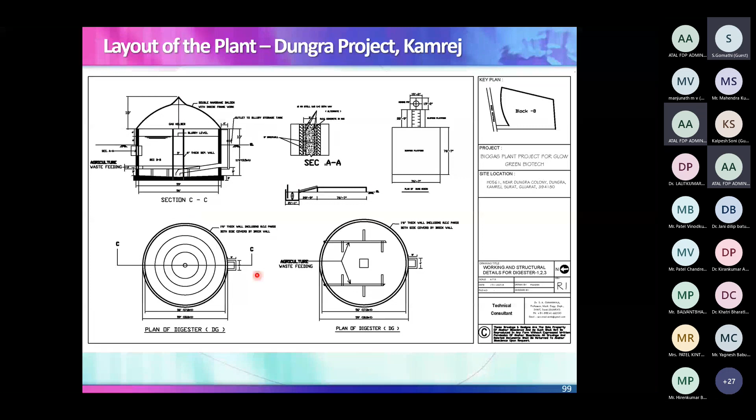Again, the feeding system, the digesters, purification system, and this is a filling station. These cascades are supplied to a bio-CNG plant of IOCL. We have signed an MOU with IOCL - whatever gas we produce, they will purchase it from us.

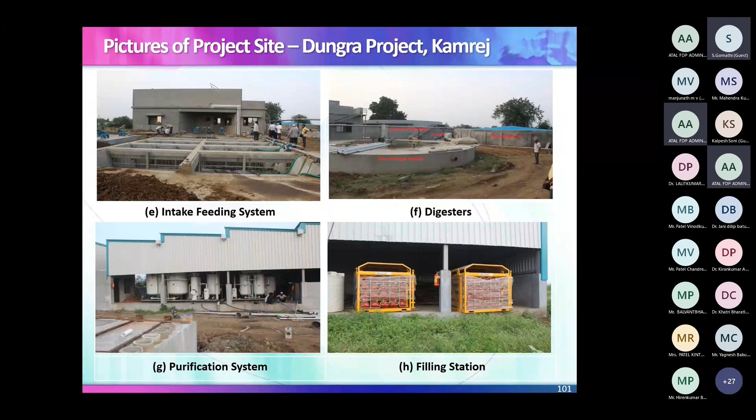Second came from Mr. Dhananjay, who is an agriculture officer in Maharashtra. What he writes: this miracle happened after use of our Glow Green LIQVITONIC. Crop of curry patta was totally dry but got green in 3 to 4 days and new shoots occurred. Again, a certificate from an agricultural officer, it speaks a lot for me.

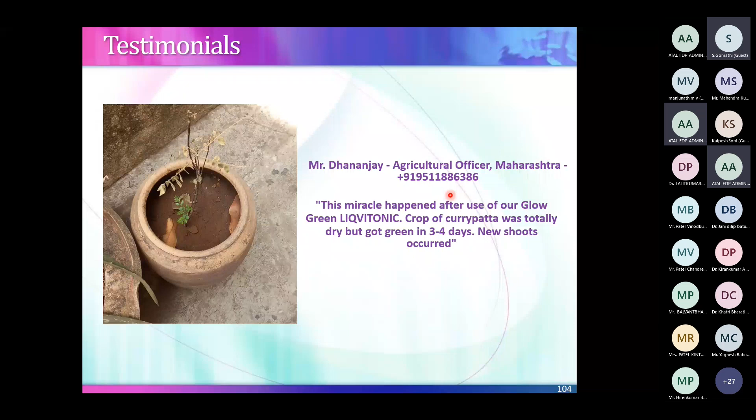Then we wanted one step ahead. We wanted to export this. And the moment you want to export this, you have to get it certified that it is 100% residue free. In the country, the only lab is the Nasik Horticulture Lab, the pesticide and residue analysis laboratory at Nasik. They tested our fertilizer for 260, you can see, 3 residues, and certified that it is 100% residue free. That means use of this fertilizer will not produce any harmful fruit, vegetables or crops. That is the greatest certificate which we have achieved.

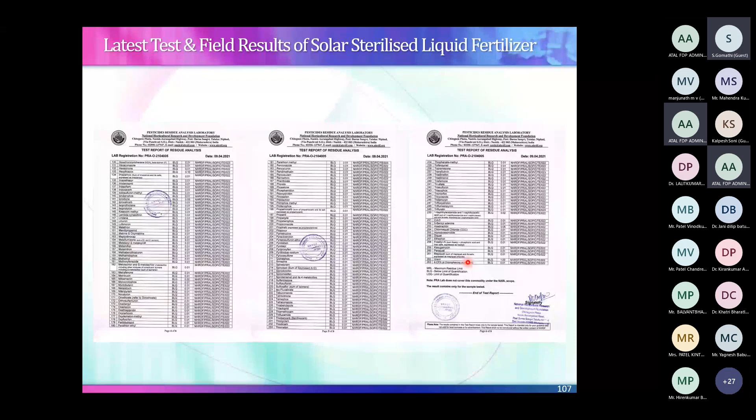What is the conclusion of part 3? Waste to Wealth project is an upcoming field in the era of the green energy revolution.

And now we go for overall conclusions. The present level of energy consumption and alarming emission level warrants the search for technological pathways towards sustainable green energy solutions, which are feasible and easily adaptable to existing technologies. Second, a coal-based thermal power plant incorporating a gasifier and supercritical boiler is a feasible technological pathway towards sustainable green energy solutions.

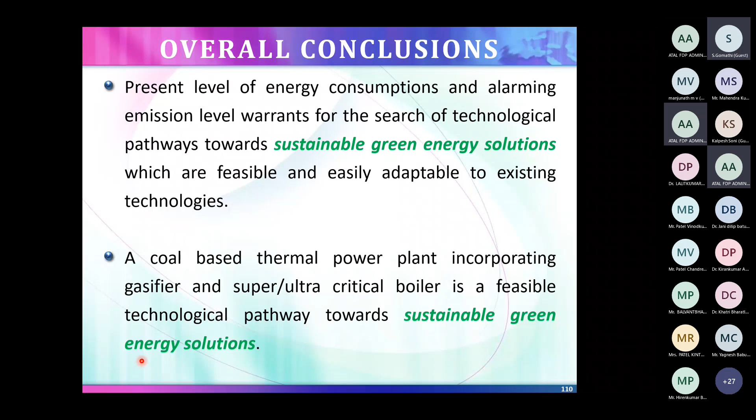The third part: plasma gasification based power plants can generate power from any waste or coal, along with producing useful products like blocks, tiles, etc., and thus truly offer 100% clean energy systems. And fourth, bio-CNG is an upcoming era of waste to wealth projects offering green energy solutions along with organic biofertilizer to improve soil and crop quality, leading to better human health.

So let's all work together for a better tomorrow. When we leave this world, we should offer an environment for our kids or children for a better tomorrow.